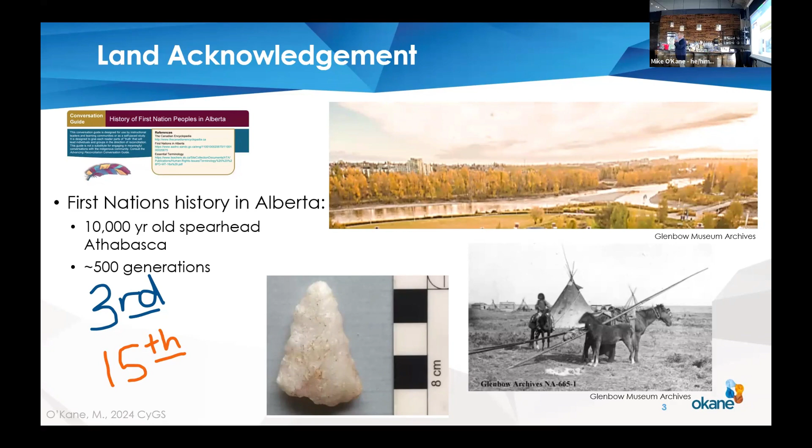And the point I wanted to make is that time becomes incredibly important. So one of the first things I wanted to land on with you, as we talked about a land acknowledgement and then switch to what I would argue is land transition, is that when you're transitioning land, you need to think about temporal scale. Time is important, getting on the same page about that.

So here's a framework that we stole, the International Network for Acid Prevention, INAP, when we wrote a global cover system design guidance document published in 2017. And we stole from the Canadian Dam Association a thought process and framework for thinking about temporal scale and time.

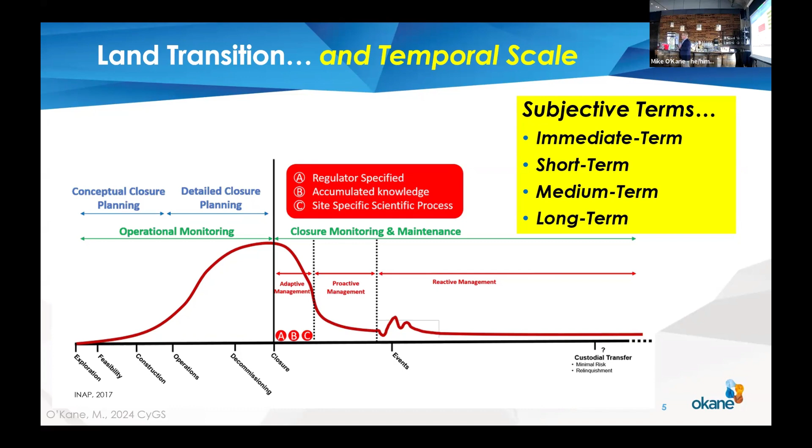So we know that's important, and we know it comes in throughout our industry. If you're involved with development of a resource and a project, you maybe have contributed to an NI 43-101. This is the instrument, the tool that allows us to define resources and reserves and use these modifying factors. It's the mining rule, the application of law and policy that allows us to develop our projects. And we measure over time the discounted cash flow of the value of the asset as we move from exploration to resource, to economic assessment, reserve, and then into production.

So there, time is important. Temporal scale is really incredibly important. Even if I was thinking about it—a lot of us are design engineers, we do a lot of design. Well, there's design life. What's your design life? Your life expectancy of the item you're designing. And what's your assessment period, of what you're actually going to go and understand risk?

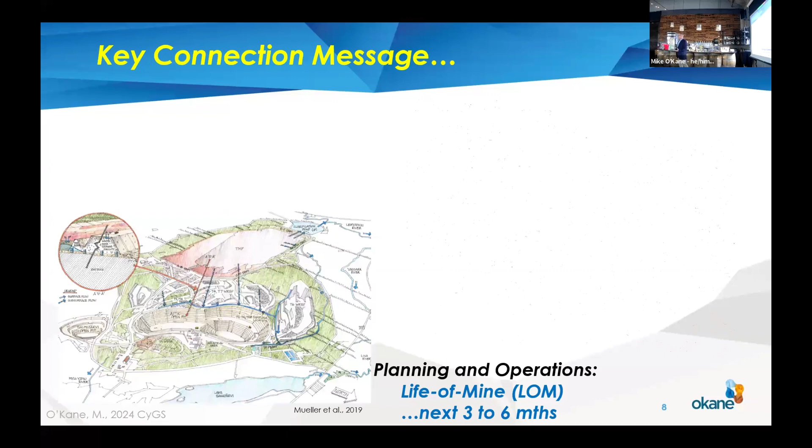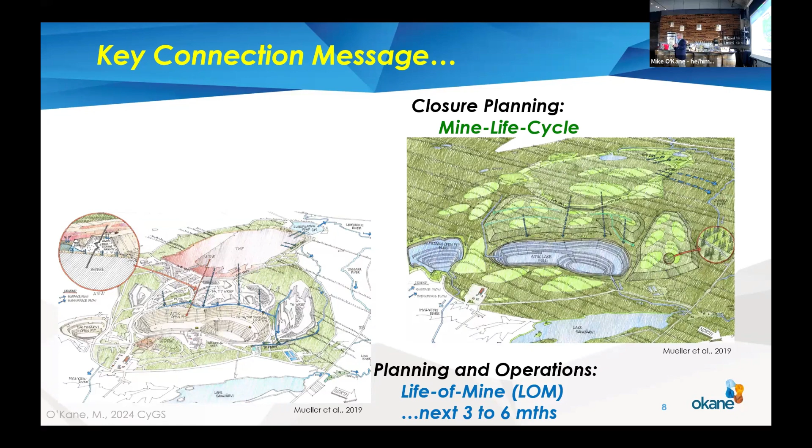Time is incredibly important. If I was in the mining industry and I was thinking of a mine site and I'm worrying about production and getting that rock out and being able to build my rock stockpiles and tailings storage facilities, it's planning and operations. Life of mine would have a different context for time if I was in the closure planning space. I'm a closure planning practitioner, I'm thinking of the mine life cycle. So automatically, if I've used these subjective terms and I haven't defined them for a particular project and with the people I'm working with, when I'm on a different temporal scale, I've got a different risk profile.

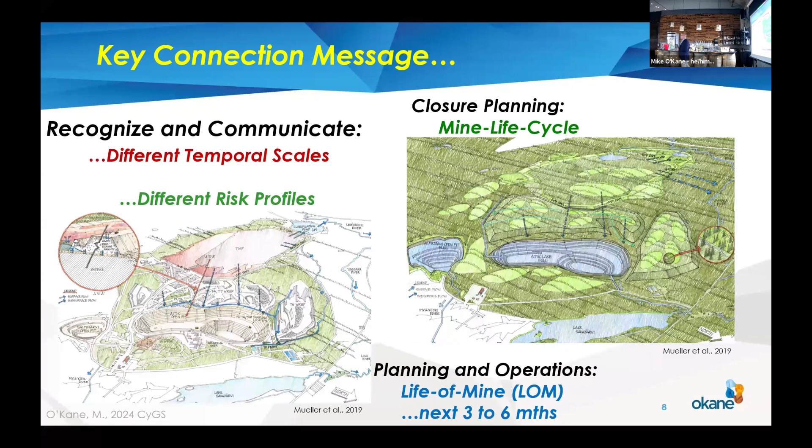And therefore, one of the key messages I want to bring across is usually when there's a disagreement about design, one of the first causes to look for is there's misalignment on temporal scale. What you think is important over time may be different than what I think is important, because I'm going to tell you, I'm going to solve that problem later, or vice versa. So temporal scale and getting in line with that is incredibly important.

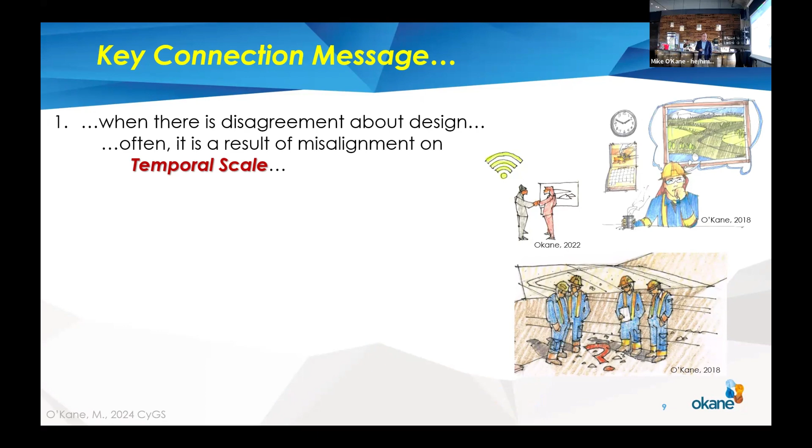Now, one of the things you may have heard of if you've been involved in the mining industry is these terms PAG, NAG, and TIL. Well, I was a haul truck driver as a summer student at a mine site in the north end of Vancouver, and all I knew is somebody would say, truck 1859, take it to the PAG pile, the NAG pile, the TIL pile. I had no idea. All I knew was I was making a lot of money as a haul truck driver.

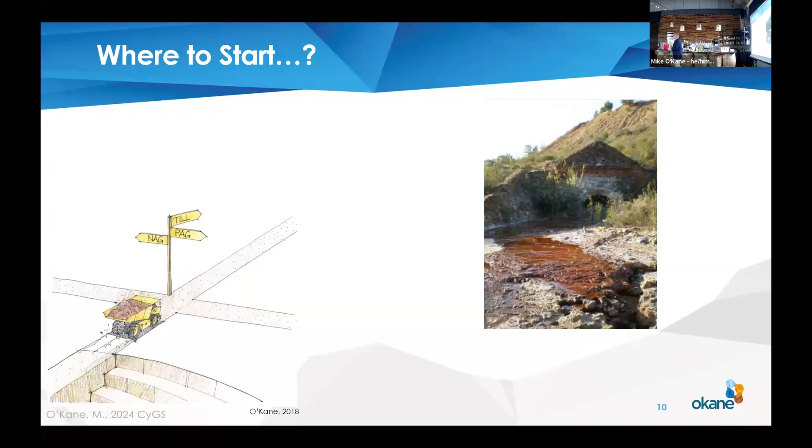Now, on the right-hand side is a Roman portal, and there's documented evidence from the mid-1500s of acid rock drainage. That's the familiar iron staining, that iron hydroxide that you see in the water. As the water at a lower pH becomes oxidized, the pH rises, and then the iron hydroxide starts to drop out. So that's that balance of the potentially acid-generating material.

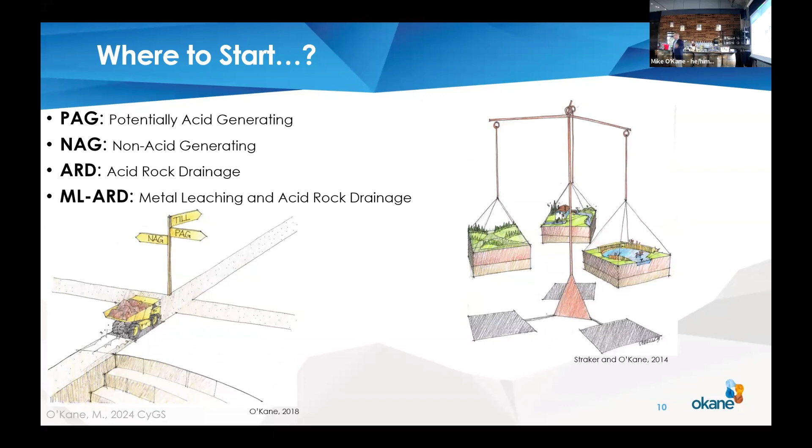Essentially, it's just accounting, right? We're balancing how much sulfidic material, the acidity we generate, against how much neutralizing capacity is available in the water. When there's 2 to 3 times more alkaline material, we label it as non-acid generating. When there's less than that, it's potentially acid generating. When it all comes together, it manifests itself as acid rock drainage, or metal leaching and acid rock drainage. That's what we saw in the picture there - metal leaching and acid rock drainage. That's the issue we most often have to deal with on a long temporal scale within the mining industry.

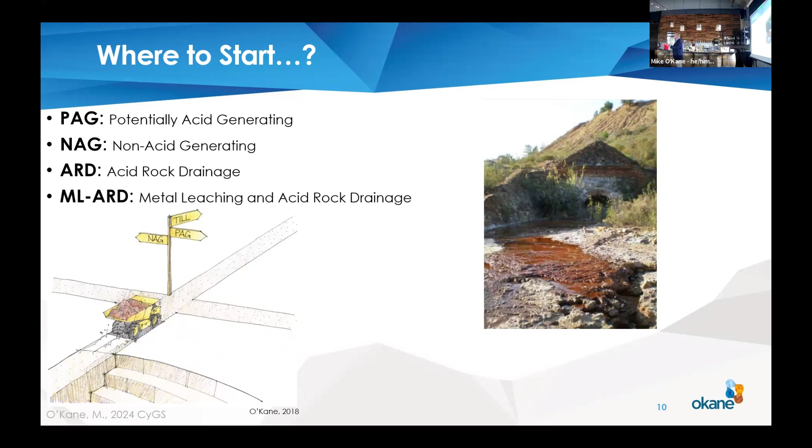Because what are we doing? We're taking something out of the ground and placing it in the first imbalance it's going to face - a thermodynamic imbalance. It's chemically imbalanced. We're providing oxygen to it, and it's going to want to move to a lower energy state. In addition, we're putting it above ground, so the other driving force, gravity, it's going to want to drive towards a lower energy state. So most of what I'm going to talk to you about today is these two things working against us: thermodynamic imbalance and gravitational imbalance, potential energy. Everything wants to move to a lower energy state.

And so that's what the application of what I think I do most often is - trying to balance this and understand it in the physical context of the mine waste and the mine rock that's actually put on the open pit.

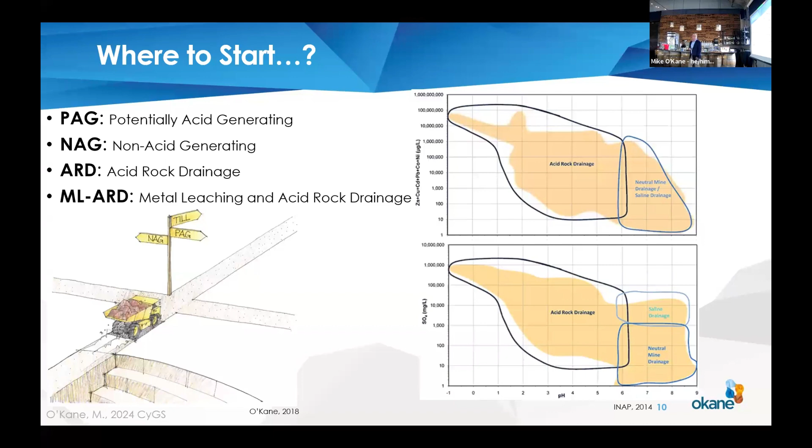So, PAG, NAG - I didn't know what it was. I was working at the open pit, the Island Copper Mine, driving my haul truck around. And I was very fortunate - I was working with my older brother, Kevin, and I was living out for free. I was even better off, I was a rich summer kid.

He was doing a project for the south wall pushback - about 1.5 kilometers or so of a 30 to 40, 50 meter deep slurry trench cutoff wall. That's Rupert Inlet on the right-hand side, and the open pit, so they had to hold the water back. Kevin was the project manager, I was a summer student, and I had to do a 4th-year project. So I said, this will be the easiest 4th-year project ever - I'm just going to take all that data, write my 4th-year project, and be done.

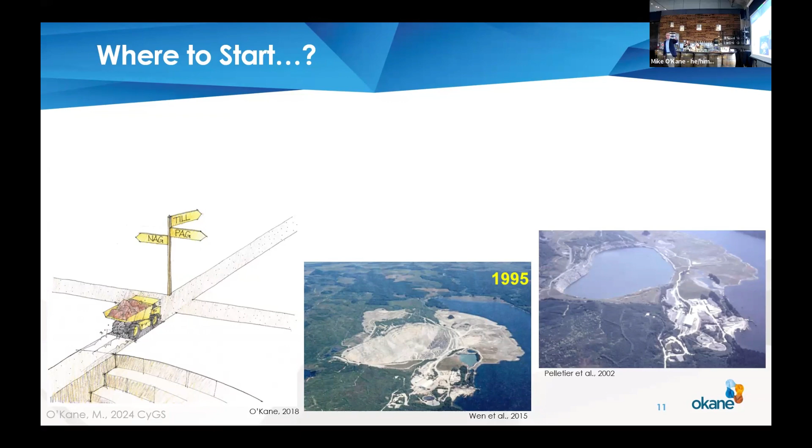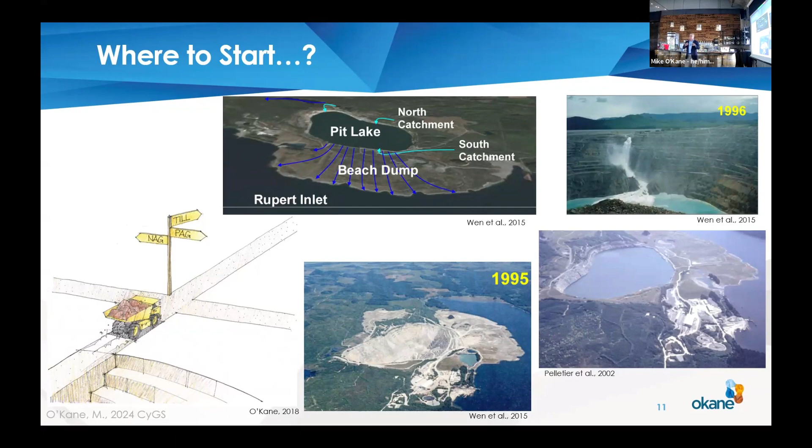But I went back and talked to Lee Barbour. I said, I've got the greatest project ever.

He said, that does sound really neat, Mike, but you should go back and ask your brother if there's an acid rock drainage issue with that mine site. I said, I don't know what that is. I went back and talked with him, and he said, oh yeah, we have an acid rock drainage problem. So that's how I first got introduced to cover systems.

How can we take that thermodynamic imbalance and that gravitational imbalance and put a cover system on to change the physics of the biogeochemical system in order to be able to have this system that stores water, releases it, and compacts the till layer and all that sort of stuff.

That eventually led me to do my thesis at the Equity Silver Mine, which at that time was owned by Placer Dome. I was very fortunate, I had a really hands-on thesis. I was installing sensors - in fact, we were inventing sensors in order to manage and understand how that cover system was performing. It had just been built, finishing construction when I was starting my thesis. We installed suction sensors, water content sensors, weather stations, lysimeters, and all kinds of things to ask: how's the cover system doing?

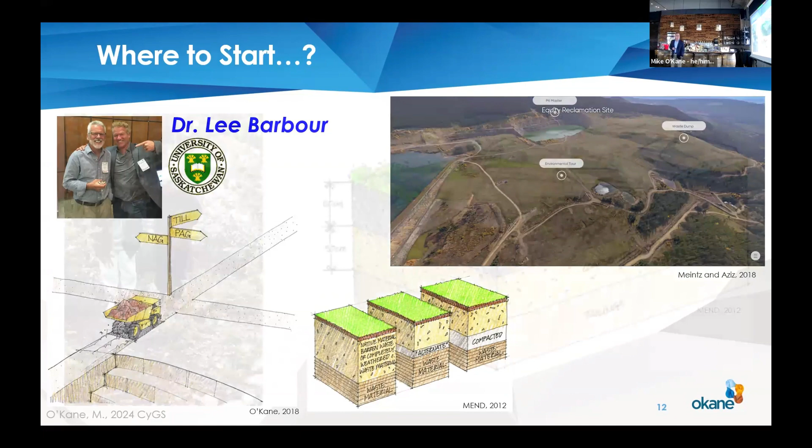And I tell her like this super cool cover system holds on to water and releases it back into the atmosphere through transpiration. She goes, that sounds really interesting, Mike. It actually sounds like gardening. I said, no, Auntie Kay.

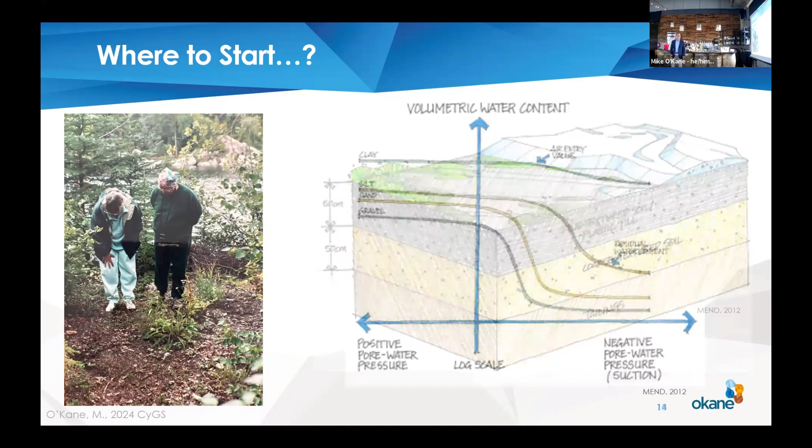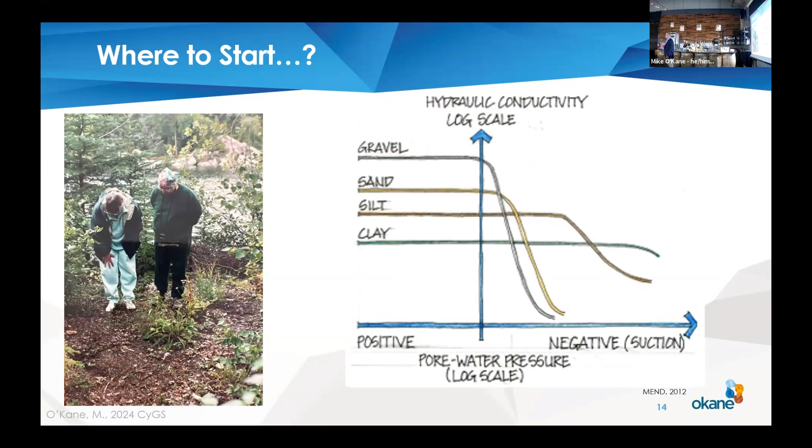She goes, so that really sounds a lot like gardening. And I said, no - I've got this data. If you see the data, Auntie Kay, I drew all these, and I said, look at all the water that's being held over this coarse textured material here. It's drained, it's a barrier, it's really neat stuff.

So that's the next key message: when there's disagreement about your design intent, very often, just simply turn it back to basics. Keep things as simple as possible, but no simpler, so you don't miss the little edges of complexity that you have to account for.

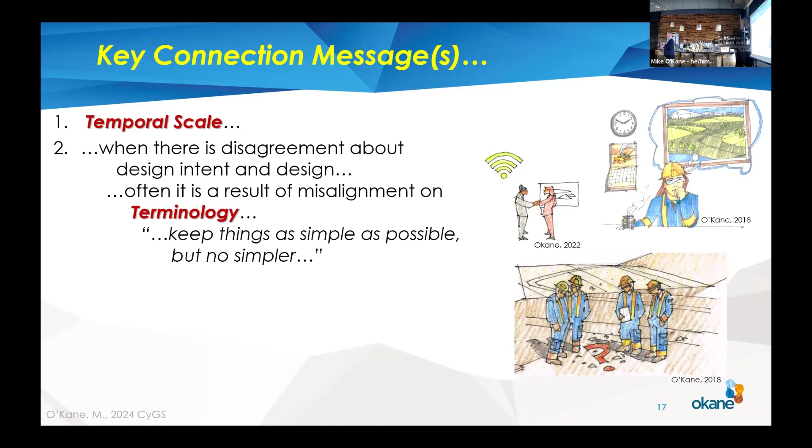So why unsaturated soil mechanics? This is what I grew up on, right? This is a chart from the Mine Environment Neutral Drainage Program, where we developed these different kinds of cover systems. This is the cold regions cover system design guidance document - a MEND report that we prepared for the federal government. There are all kinds of different cover systems: capillary break ones, reclamation ones, seasonally frozen capillary break ones, store and release ones, reclamation, isolation, saturated covers.

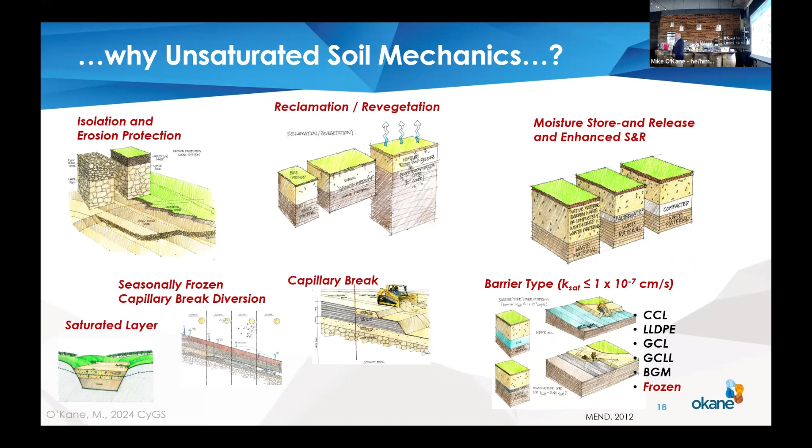So I don't need to go through all of these cover systems, but I did want to share with you a few things that I believe we all have in common. One of the first things is that they're all about land and water stewardship. They're that interface between the underlying material that the mine produces and the biosphere, right? They're what we need to be able to put in place, consistent with the landform, so that I can actually understand the land use.

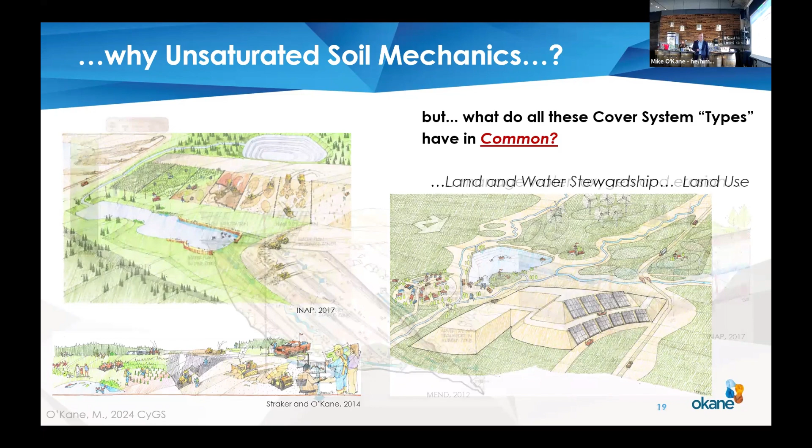So it's land and water stewardship, land use. I'm going to come back to that theme of the importance of land use later. And it doesn't need to just be ecological restoration - there could be all sorts of things: energy storage, energy generation, some combination of different things. What do they also have in common?

On the far left-hand side, it's about water - enhancing the near surface water holding capacity for plant water use. It's also about managing water: how much net percolation, how much goes down and leaches through, how much oxygen comes into the system, whether or not there's erosion. Have I created a system of high energy potential on a slope where the system wants to move to that low energy potential?

I want to manage water and oxygen to minimize net leaching and gas creation. So I've got systems that are uncovered with lots of high water flow, and I put a cover system in place to manage water and oxygen, then pick up any remnant seepage from the base of the facility that might still adversely impact the receiving environment. I do collection, conveyance, storage, and treatment of that seepage so water quality released to the environment is good.

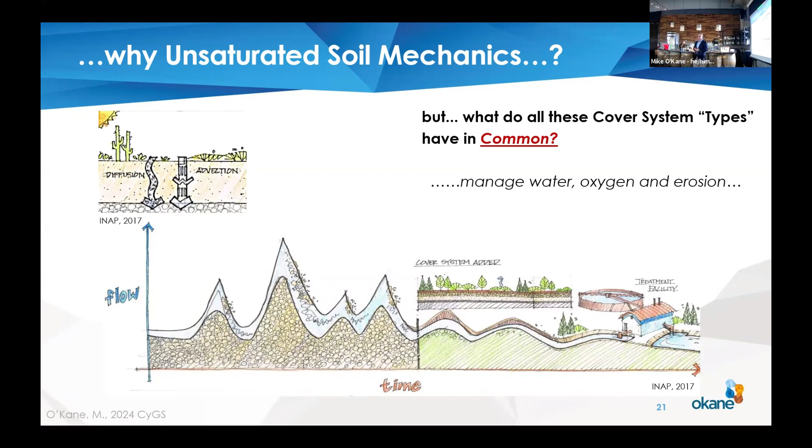As I said, they're unsaturated systems. Unsaturated - I didn't realize until third year soil mechanics, learning about compaction, that that's unsaturated soil. Some of the pores are filled with air, some with water, as opposed to a saturated system all filled with water. And finer texture material holds on to more water than coarser.

Their performance is dominated by site-specific climate conditions. If I was designing a cover system in Calgary, it would be completely different than if I was in the outback of Australia, because climate is different. If I was to design a liner, a pond, or a lagoon in those two different locations, arguably they might be about the same - compacted clay, permeability, and all that kind of stuff.

But because they're exposed to the atmosphere, their performance is dominated and influenced by site-specific conditions. So when I think of cover systems, it's climate first. The lens I look through is what's the possibility through climate first. We use the Koppen climate classification system to conceptually describe climate before doing any fancy modeling - what's the dominant season: arid, temperate, tropical, cold, and what's the seasonality of precipitation and rainfall. Before you know it, I've described the possibility of climate without even having to think about numerical modeling or averages.

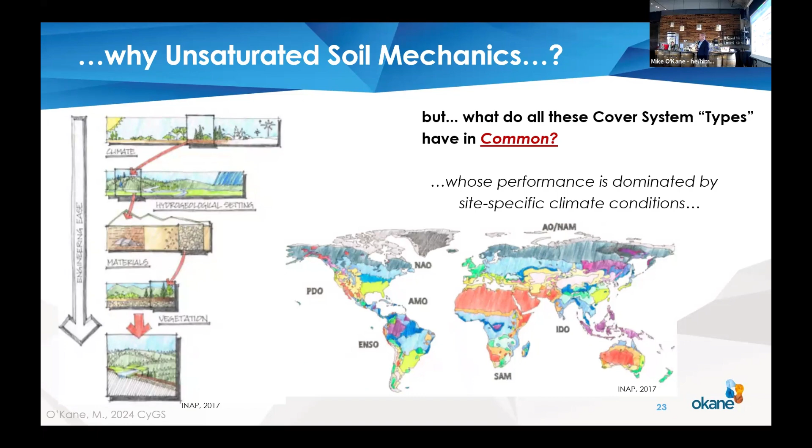So: unsaturated systems, cover systems, and landforms - think climate first, and always think that cover systems are not caps, or upside-down liners. You don't want to fight nature, you want to work with nature. Their performance is strongly influenced by site-specific conditions.

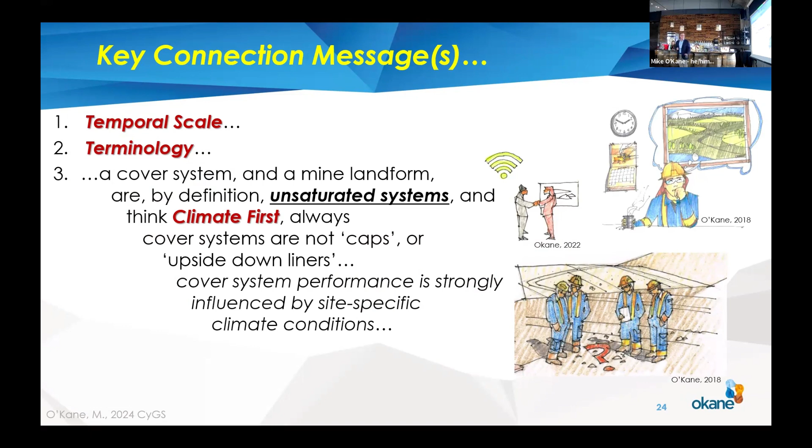What I was really fortunate about is my brother also worked in mining, and he's gone on to a very long career. He provides a lot of guidance and mentorship. But if I go back to the Island Copper Mine, I'll tell a story of another fellow who was a big part of my life professionally - Andy Robertson. I had a fortunate opportunity to interview him as part of the Landform Design podcast, Getting Closure. In that podcast, I told Andy the story of when my brother Kevin was hosting Andy at the Island Copper Mine.

Andy was the rock mechanics slope engineer, the consultant for Island Copper Mine. And Kevin was the chief engineer. He told his boss, Andy's coming to town, he's going to come and visit. And his boss said, well, don't let him near any more waste rock dumps because he's going to find more acid rock drainage. Stick to the rock mechanics. So Andy had a really good laugh about that. But Andy was a big part of my career, he was very supportive of me. I had a lot of long, great conversations with Andy over the years. So that's a super cool connection.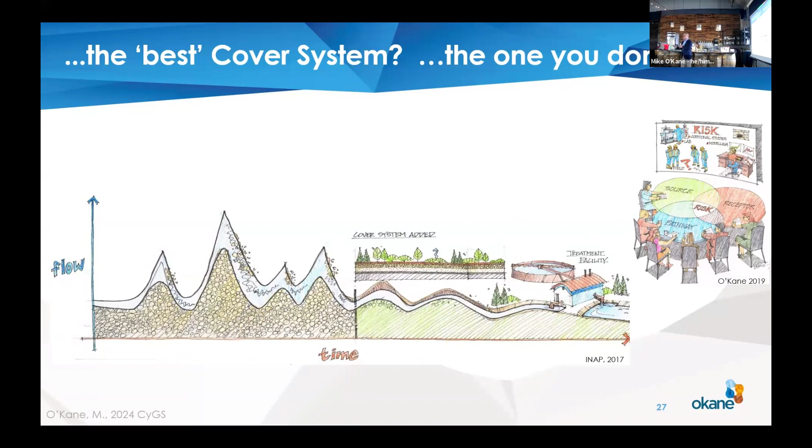And that would lead you to, on the right-hand side, where we'll focus. If you've ever done a failure modes and effects analysis, or a multiple accounts analysis, which is now standard procedure in the mining industry, in fact it's ingrained in some of the regulatory processes in many jurisdictions. Those were pioneered with the vision to bring them into our industry. So always talk about source pathway receptor, and you would recognize and say, hey, the cover systems and the treatment, that's a pathway and receptor management mitigation. Could we actually move up the chain and think about source control, and apply these imbalances of thermodynamics and gravity to be able to manage tomorrow's risks today, and not just rely on cover systems and treatment?

Because our lived experience is just this one example. This is from the Equity Silver Mine, and there's a great paper at the BC Metal Leaching and Acid Rock Drainage Conference by Corey Meints and Mike Aziz in 2018. They report over 30 years of water treatment, collection of metalliferous and acid rock drainage, and treating it in their high density sludge treatment system. Almost 1 million cubic meters of water treated over that 30 year period. Initially, the 100-year net present value prediction of what they needed for financial assurance, the Province of British Columbia, was $20 million.

In 2017, some 30 years later, it was now $88 million. So there's increases in understanding the source term, with water coming from different places than they thought there might be, increases in lime usage, increases in lime costs, all calculated along the way. And that's without the $1 to $2 million that were used to actually treat the water every single one of these 30 years. So our lived experience is, if we wait and try to solve the problem later, it might not actually be the best approach. Perhaps we should think about how we actually solve it from a source control perspective.

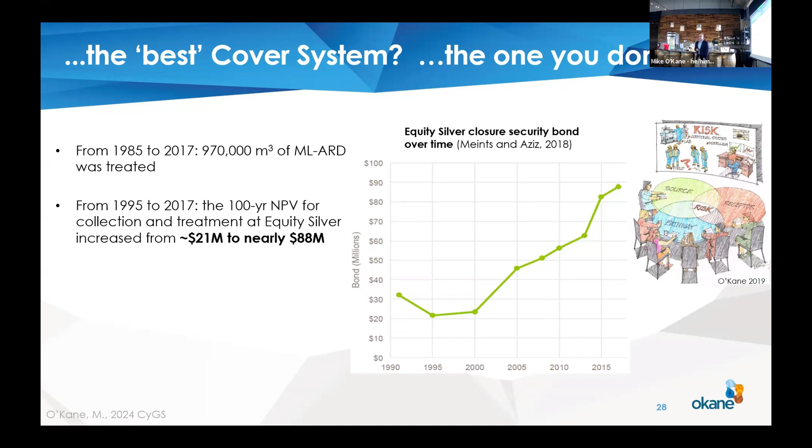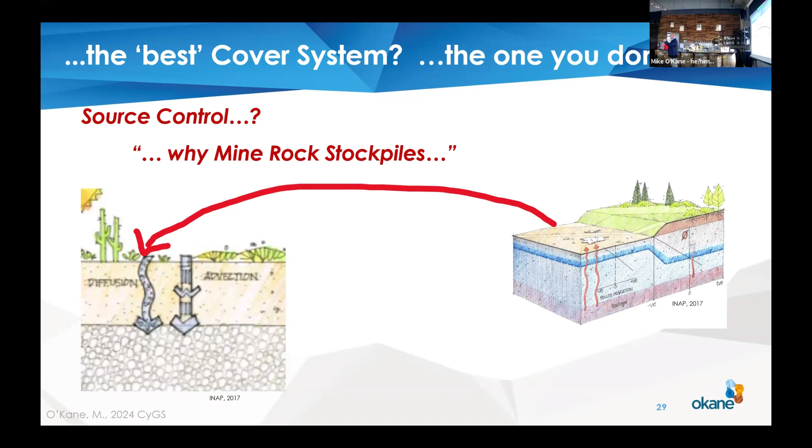So the next question is, why am I going to focus on mine rock stockpiles? A little bit about tailings storage, but why focus on mine rock stockpiles? It's because tailings storage facilities are finer textured material. The oxidation that results in that thermodynamic imbalance, that's a diffusion controlled system. It's surface dominated, right? It's going to diffuse through, oxidize sulfides, and have an advancing sulfide oxidation front. So it gets harder and harder to get oxygen into the tailings and oxidize that sulfide. It's self-limiting. On the other hand, mine rock stockpiles are dominated by advective gas flow entirely, as well as unsaturated soil mechanics.

I have a material that's coarser textured, generally well graded. I place it over a large lift, it segregates. I get rubble zones down at the bottom, coarse and finer textures all at angle of repose, generally coarser texture material at the bottom, finer at the top, but high airflow capacity. When I have a difference in temperature inside the facility compared to outside, I have thermodynamic disequilibrium. The warmer air is more buoyant, it will rise, it'll draw more gas in from the side, so I get this continuous resupply of oxygen for sulfide oxidation. If it's the other way around, where it's cooler inside than outside, if the temperature changes outside, that air will actually become less buoyant, it'll fall, and I'll draw more oxygen from the top. So I have this continuous resupply of oxygen, continuous sulfide oxidation, continuous generation of source. Of course there's diffusion as well, there's lots of exposed surface area.

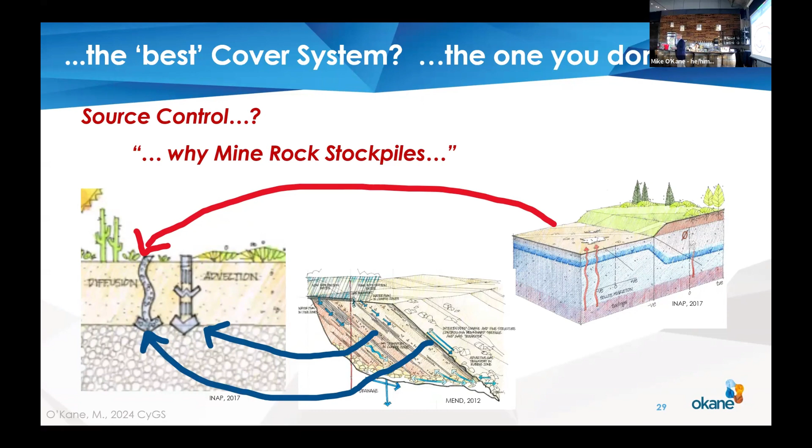So mine rock stockpiles contribute well over 75% of the acidity generated at the mine site. In fact, at Equity Silver Mine, in the 30 years of collection and water treatment data, almost 95% of the water they collected and treated is a result of the presence of mine rock stockpiles. It's not the tailings storage facility. In fact, where we often get metal leaching and acid rock drainage from tailings storage facilities, it's because the rock runoff contributes different elements, not actually from the tailings. Tailings need to drain down, we need to have all that oxidation product work through at a certain pore volume loss of 20, 30, 40, 50 meters from the top to the bottom, all the while picking up alkalinity.

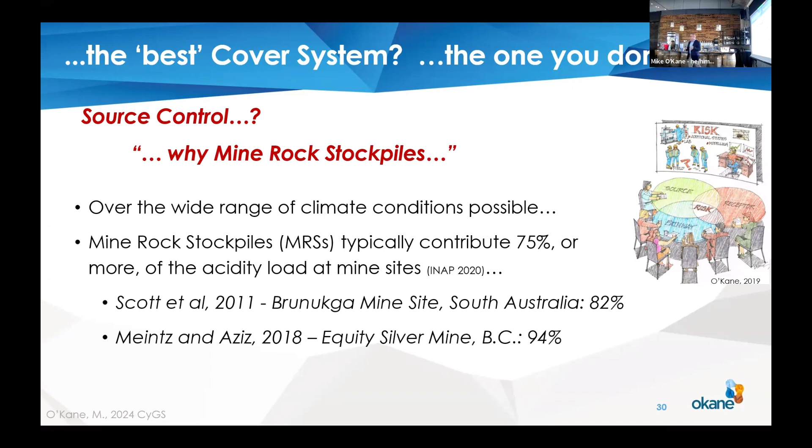A good friend of mine, Peter Scott, and I wrote a paper at the Brukunga mine back in 2011 at the mine closure conference. At that site, 82% of the acidity generated and treated is from the mine rock stockpiles. The mine rock stockpiles represent the biggest risk compared to all other landforms and sources with respect to metal leaching and acid rock drainage, because of that advective gas flow.

So how the mine rock stockpile was built influences how it performs. It's how it was built, no different than anything else - everything you build is defined by how you build it. Coarse texture material, segregation from depth, thermodynamic non-equilibrium always trying to come to equilibrium, and then the material wets up, and gravity, moving downwards.

So these are structures with high airflow capacity, consistent resupply of oxygen that continues, and ongoing acidity generation. Eventually it wets up, drains down, and I get metal leaching and acid drainage coming out of the base.

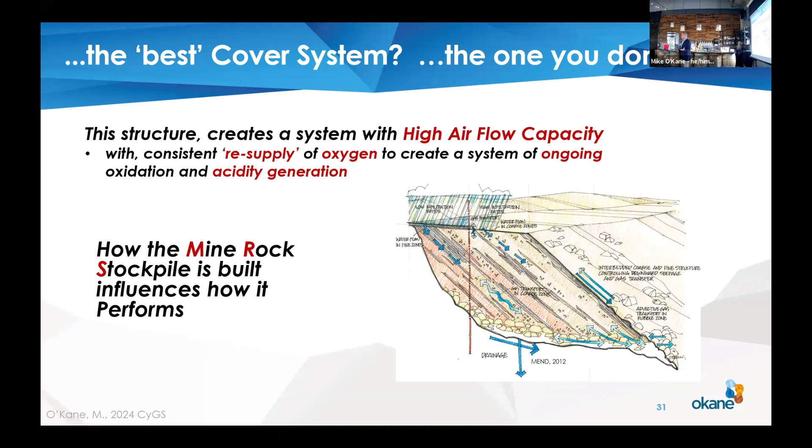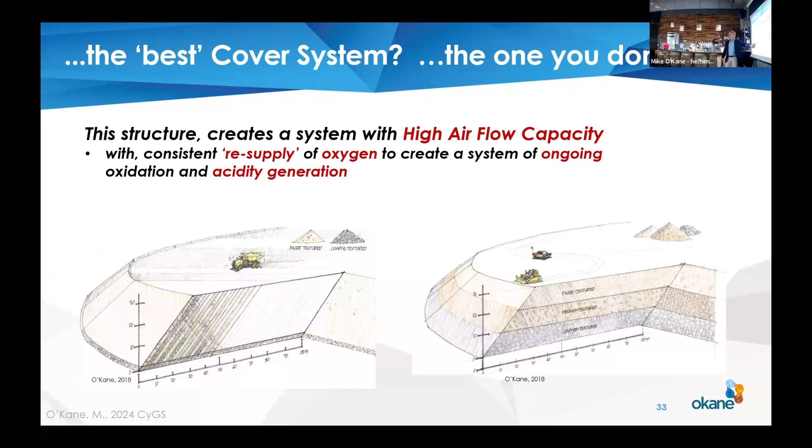Same thing happens for an open pit. The previous one I showed you was a valley type mine. So if I was on an open pit on flatter terrain, I get that same sort of action. I'll break out the two conceptualizations: here's my coarser and finer textured zones, here's my rubble zone down at the bottom, generally coarser to finer for that 30-meter length, as conceptualized. Those things happen as well.

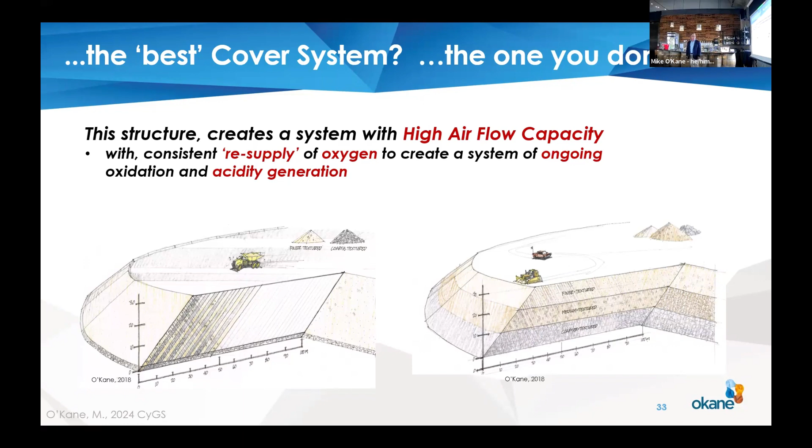So I end up with this system where I have non-engineered fill - that's the definition here, a geotechnical definition of sorts - a low level of control and a high level of uncertainty of my outcomes. And then I'm going to build this complex cover system on top of everything, and do water treatment. So I'm challenged with predicting the results with some confidence.

Surface water, the recoverable, unrecoverable seepage ratio - meaning I've got water coming this way and that way. What percentage of that water do I need to pick up in my collection and treatment system so that this unrecoverable seepage is okay to be released? That's a hard number to figure out. And then what's the quality of the water?

So the best cover system is the one you don't need, but let me build on that. I've got this water treatment - that's a proven technology, high level of certainty. There are new treatment technologies coming out, but basically managing low pH water, putting alkalinity in line with it and dropping it out - that's proven technology, right?

But I would put to you, collection, conveyance, and storage of water is not proven. It's incredibly site specific - how hard or easy it is to pick up that seepage is entirely site specific. I'm going to pipe that water. I've got a ditch - I don't want the ditch to leak. I'm going to pipe my seepage, put it in a pipe.

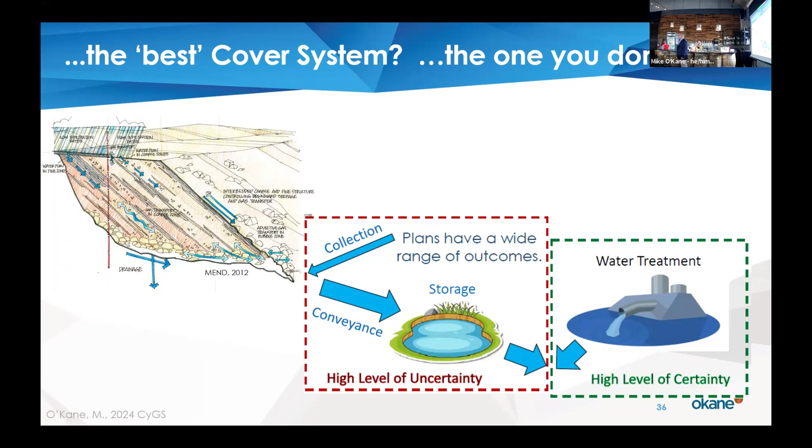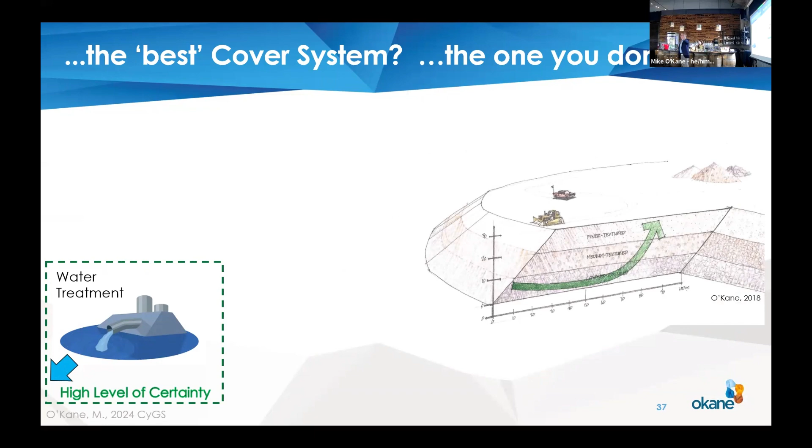So the same thing happens when I take this water treatment to my pits - my open pit on flat terrain. Here I'm depicting deep ingress of oxygen, continuous resupply. It's warmer inside that facility than outside, so I'm gathering up gas, continuous resupply of oxygen. Same problem - I've got to collect, convey, and store water. Lots of uncertainty there. And this is the tool that we look at, right?

Decision making, there's a science behind it. I've got a high level of uncertainty and a low level of control - automatically get out of the fantasy world you're in, in this scenario. A lot of different situations you have to take into account, a lot of uncertainty, a lot of outcomes.

Now, the other part is I can reduce the uncertainty and have more prediction and monitoring. So what path do you actually want to go? Okay, let's go down this first path here.

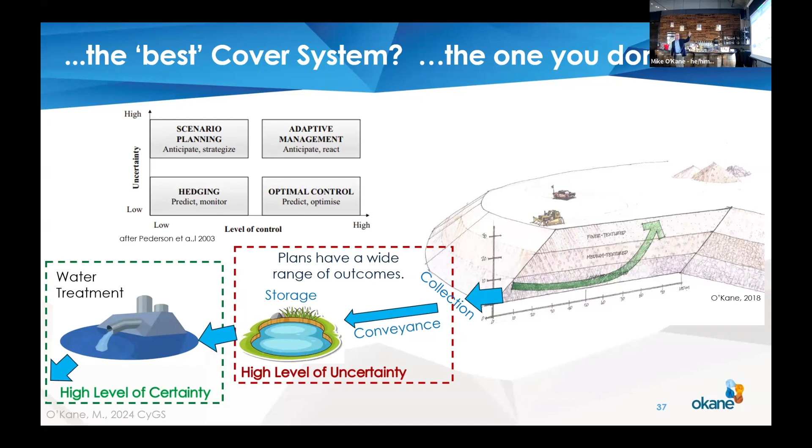Let's actually build my mine rock stockpile, recognizing that I've got run of mine material, but I just have to apply a little bit of civil engineering to it. I'm going to reduce the lift height to reduce the segregation. I'm going to add a finer textured layer on top of each one of those layers.

And what do finer textured layers do for us? They hang on to more water. When I've got more water in something, the air permeability is low. When the air permeability is lower, I reduce the vertical airflow capacity. So now my airflow capacity, with the same thermodynamic equilibrium, can't reach far into my mine storage. I've created a large zone of suboxygen, no resupply of oxygen. And as water flows through, it actually has an opportunity to pick up more alkalinity.

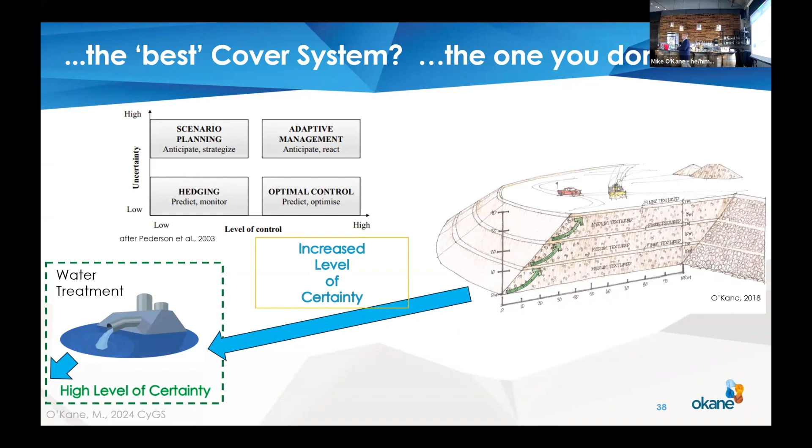Now I have an increased level of certainty, seepage collection ratios, simpler cover systems. So the cover system that I don't need is the one that's super complex. It's going to save the day. I can have a cover system that's just actually about erosion, landform stability, and water, not one that needs to be this magic thing. And I can manage the risk more effectively until the cover system is placed.

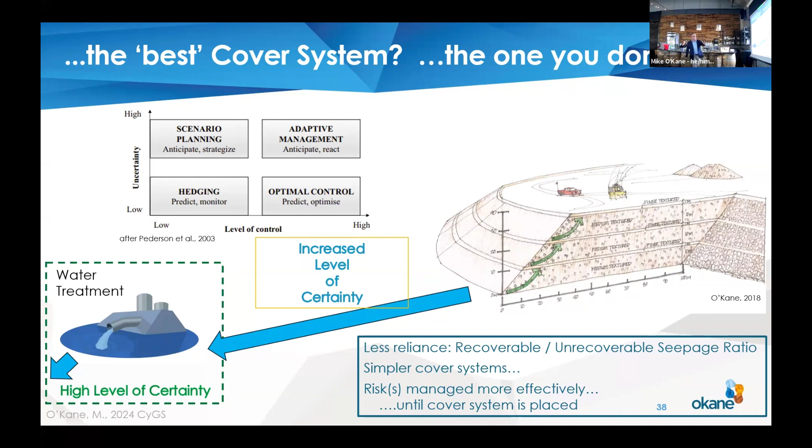Managing at the source, here's an example of that. On the left, this is from a site in Turkey. On the left is a mine rock stockpile that's constructed and end-dumped. On the right-hand side is one that has source control. So you can actually figure out what's the difference in cost to place them differently.

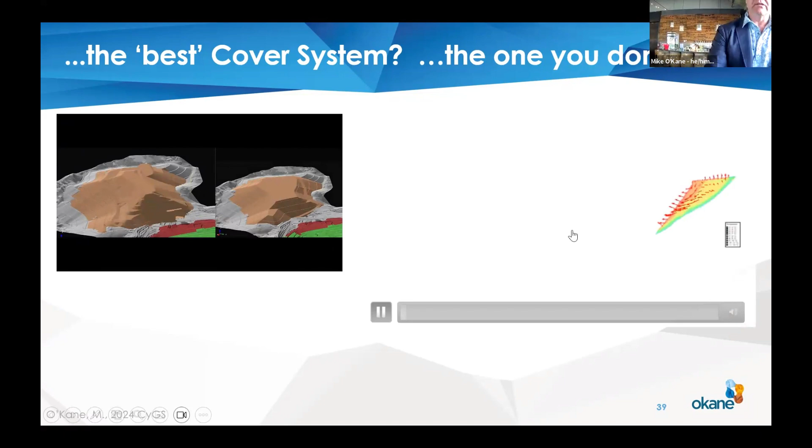And then you can say, Mike, that was a lot of arm waving with all that conceptualization. Well, I'm telling you, we can model it too. Here's that conventional mine rock stockpile. This is a coupled heat, water, gas model that allows us to predict the movement of gas and resupply of oxygen to that facility so I can calculate the acidity that's generated.

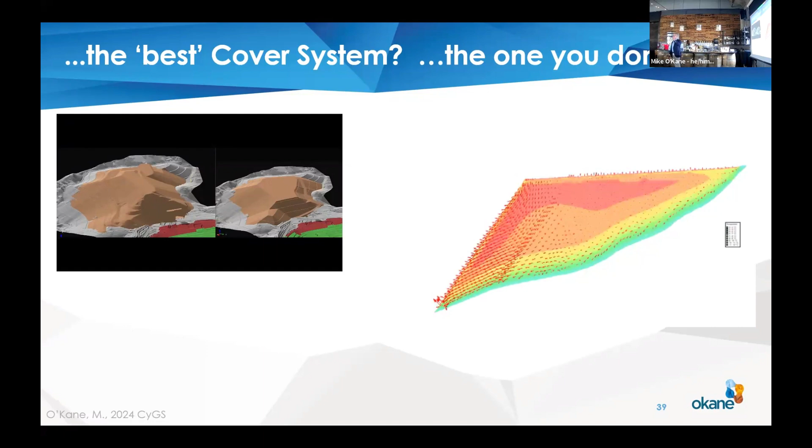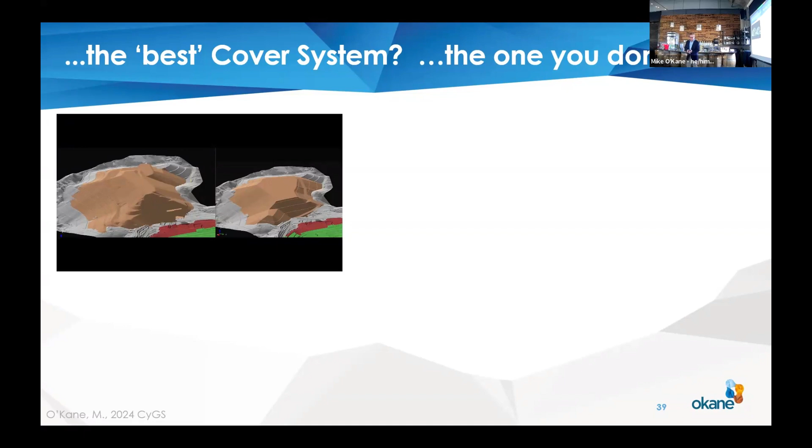Those red lines that are going back and forth are arrows, right? It's a 10-year simulation of mine rock placement and 15 extra years of sitting there operating. And what that ends up doing for us is it tells us that every time the temperature is warmer inside than outside, I get more gas in, and flip it around. So then I can take one of the days within that 10 to 25-year period after it was built, and I can plot up the differences in velocity vectors, the resupply of oxygen for one day, and compare them.

The other cool thing that happens is because sulfide oxidation is an exothermic reaction that generates heat, well, now I have much less heat generation in the facility. So now I have much less worry about the temperatures inside the facility increasing more and more. Actually, at the Sullivan mine, the temperatures that I was monitoring when I was a graduate student were like 55, 60 degrees Celsius.

There's rock that monitored at the Mount Whaleback mine, the BHP&R in Western Australia. It's a spontaneous combustion self-heating material. They can have temperatures 200, 300, 400 degrees Celsius. So once this thing starts to kick off, and anybody who's worked in the Elk Valley is familiar, you know that there's a bit of a self-heating problem. Right? All kinds of bacteria. It's about gas, thermodynamic ability, and understanding the unsaturated zone system.

So an MRS that's built with influence how it performs, a mine rock stockpile with a focus on source control represents the highest level of risk control, which is manage tomorrow's risk today by building a mine rock stockpile with source control rather than conventional. I understand that our mine plans have the constraint of the least cost manner of getting the rock out of the pit, onto the ground, putting the rock on the dock.

And we also have to make sure they're geotechnically stable, and environmental protection. Changing the 'or' to an 'and', just like we do cheapest possible and geotechnical stability, I'm adding an 'and' to manage more risk today. Adding another constraint to the mine plan - would you think about it? Amazing things can happen when you change the question, you get a different answer. Just consider it and see if you can actually.

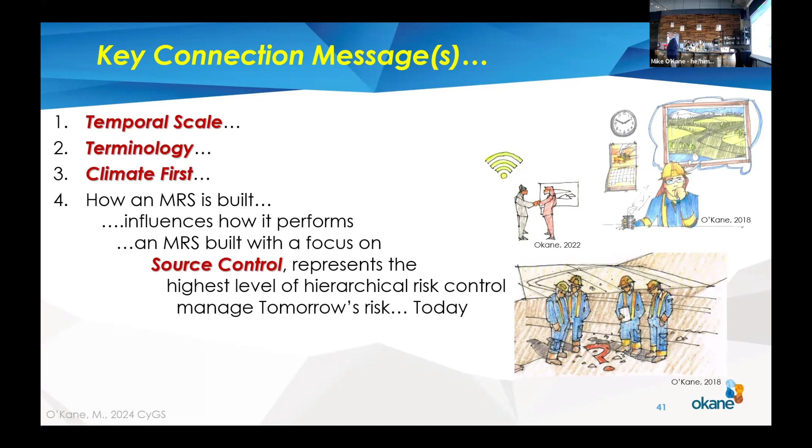So tailings a little bit. For me, it comes down to where's the water table? Where's the phreatic surface? Where is it now during operations? Where is it going to be in closure? And if you put the right controls in place with confidence, then you're going to take that full water pressure system from today to tomorrow in the right means. It always comes back to the same thing: how is it built? What's the water balance? What's the water pressure condition? Where's the water table?

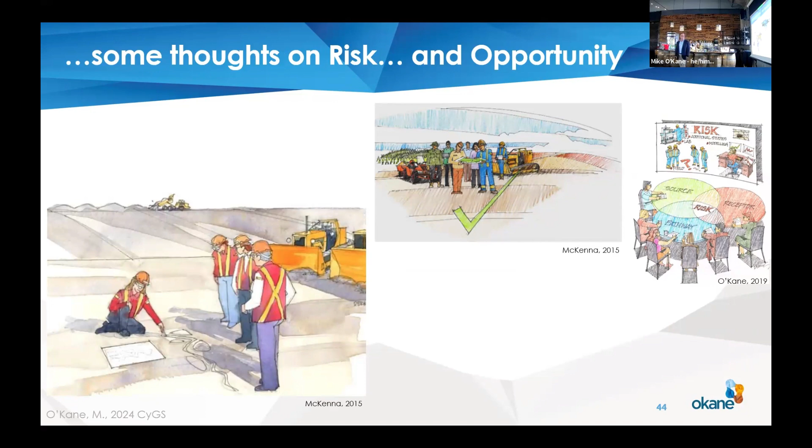So some thoughts on risk and opportunity, keeping in mind this context of what I learned from Andy Robertson. How many people were living in Calgary in 2013? Do we all remember the floods? So this is the story behind my flood here along the Elbow River. It was in and around there, and it was amazing, right? So much water.

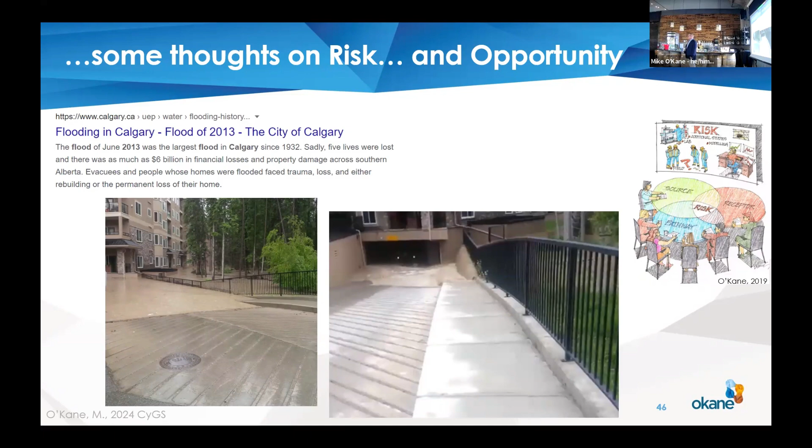These are the condominium units, the bedrooms, right there - there's one on the left and one on the right, the two photos. Can anyone tell me, just make a wild guess - what do you think is the time frame between the one on the left and the one on the right? Guesses? Would anyone guess 8 years? These condos flooded while they were being built.

So in 2005, the exact same thing happened, but the maximum foreseeable loss at that time was almost next to nothing. We just got graded, there's no infrastructure down there - no HVAC, no generators, no elevators, nothing like that. So it flooded, big deal, we let it drain, moved back in. But it happened again in 2013 - everyone was in the building, a bunch of cars got damaged, the entire HVAC system got hit, all the elevators, everything. $30 to $40 million in damage paid by insurance.

Can you imagine if we learned from this and built up a pony wall instead of a gate, or whatever fence here - actually built it up, put a berm in the background? That would have been a huge savings. So very often when we're thinking about risk and opportunity, our answers are right there.

And this is the thing that Lee Barbour was really good at, and Andy Robertson was really good at - you couldn't go into a review meeting with them because they read everything that you did. That's why they were so good, they mined the data. And that's the lesson there: they would always think about what's the most reasonable expectation, not what's more likely, always thinking about maximum foreseeable loss, and then come back from it. Rather than trying to say 'I've got so much uncertainty, what do I do to reduce the uncertainty,' they would ask, what's the maximum foreseeable loss? Impose controls, figure out what the risk is, and see if you can actually afford to live with it.

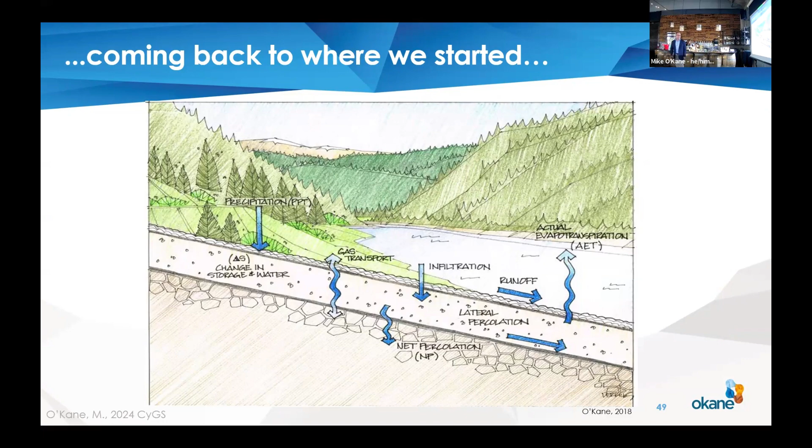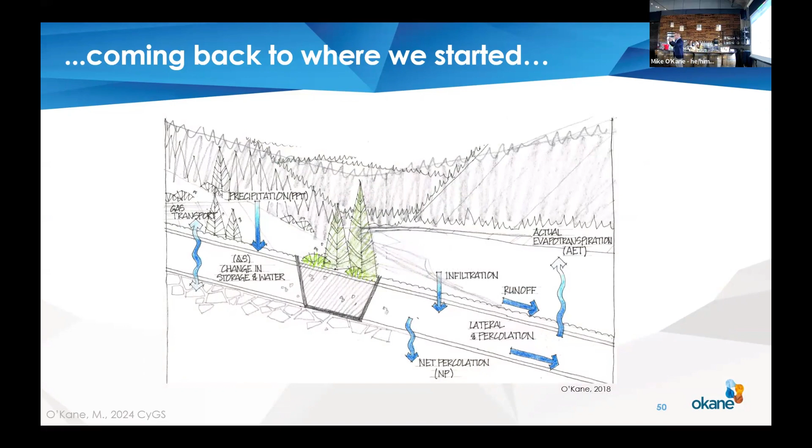But try and start to make things simpler for yourself. Just think about narrowing it down. And in fact, if you really thought about it, you could figure out the water balance for this: how much rainfall and snow water coming in, when the storage is overwhelmed, how much goes through, how much runs over the top, how much of that evapotranspires.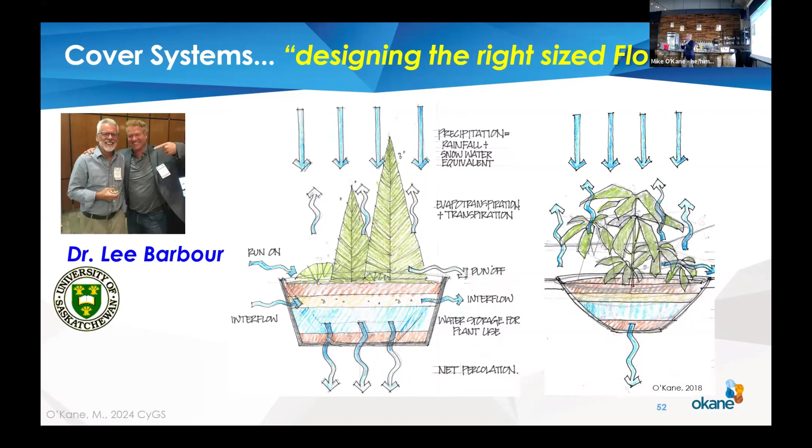In fact, cover systems are like designing the right sized flower pot. That's the lesson from me. You would always bring that forward, design the right size. Keep it as simple as possible, and no simpler, to have your complexity captured.

So cover systems are about designing the right size. Start off with a really strong conceptualization, and don't jump to the bottom. You'll get the right model that tells you the story toward conceptualization. Every single one of your conceptualizations should just tell a story about whether or not we have the right size.

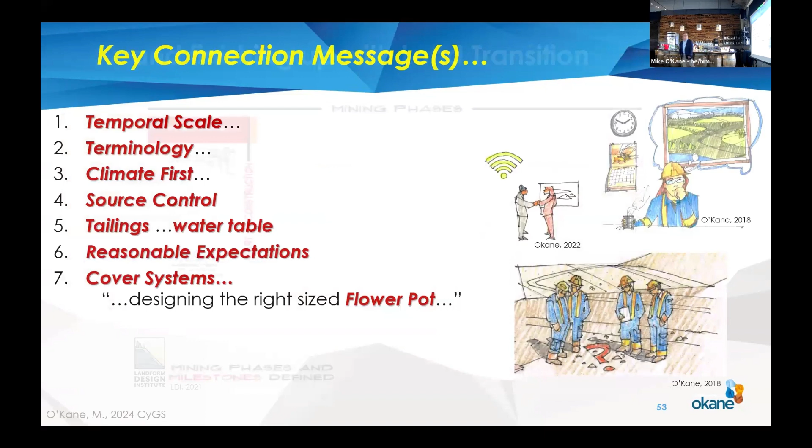So, finishing up with land transition. We struggle within the mining industry to think about what's the future when the mines close, right? My perspective is the mining industry is actually really good at understanding the value of future values. Because if they weren't, why would you go and spend money drilling and getting a permit to do exploration?

We do it because we have an eye on getting to a project description, and in the 43-101 to get more investment, to invest more money, to get another permit to do an environmental assessment. And then I want to spend more money, more investment in baseline studies to get it to a permitting condition. Then I want to spend more money because I want to get to the next land use, which is construction. I'm going to spend more money because I want to get to operations.

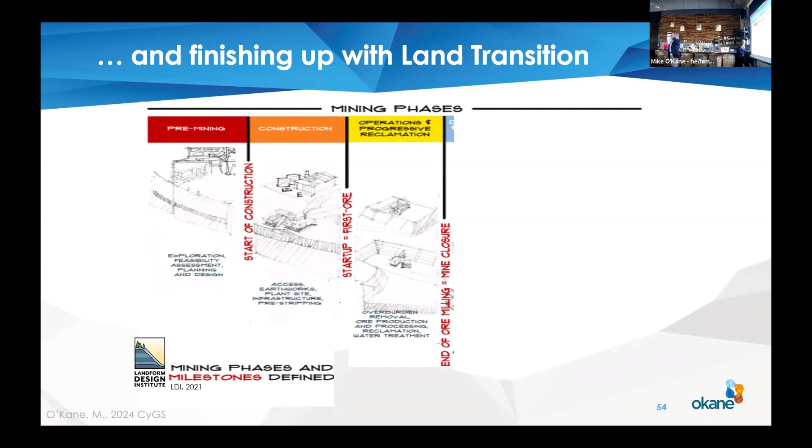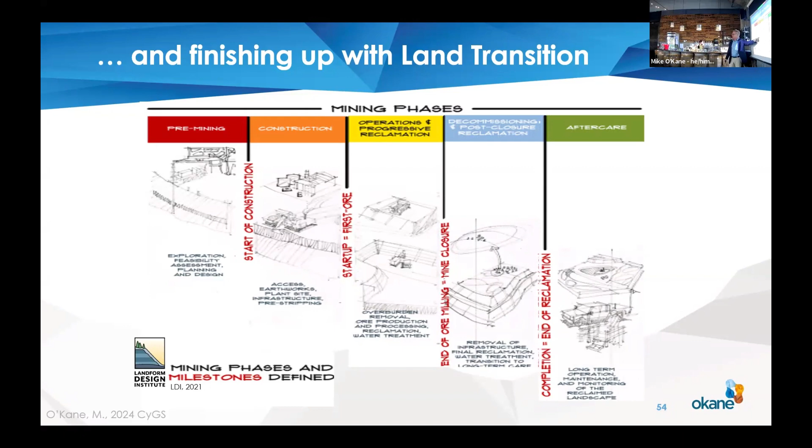The thread that we're missing as we go to closure is we lose sight of the importance of that future land use. I don't want to make a commitment because of what I want. When you weren't worried about that back here, what you did is you did the hard work to go find out, so you'd have more confidence. Right? And the same thing, future land use is that thread across time.

Future land use can be anything. I'm just pulling this from the BC jurisdiction. If you go into 10.7.4 land use, it doesn't say land use has to plant grass or trees. It says land use has to be approved by the chief permitting officer. Every single jurisdiction I've ever come across in the world is exactly similar. It can be anything we want. We just have to actually do it.

In Saskatchewan, when we go to relinquishment, that's one of the first models about relinquishment, the institutional control program. It's about saying, I'm going to monitor over time, so I have confidence, I understand the maintenance on an annual basis, and the unforeseen funds that could come up. So this site, the Cluff Lake site, was moving into Saskatchewan's ICP, which is the institutional control program for relinquishment. It's on its last permit from the federal government licensing. Orano has done an amazing job over 20 to 25 years of moving it towards this.

This one's near and dear to me because this is one of the first cover system landform designs - the mine rock stockpile on the bottom and the tailings storage facility at the top. Right, over 20 years, keep the faith, think about the future land use, and we're going to move towards it. So it can be done when you're thinking of the future land use and where you're going to go.

And the tools we have are there. Look at the modifying factors to take resources to reserve: legal, environmental, infrastructure, social, economic, and governmental. Those are all about the future, right? So you have somebody who's investing in your property has confidence that you've done it right.

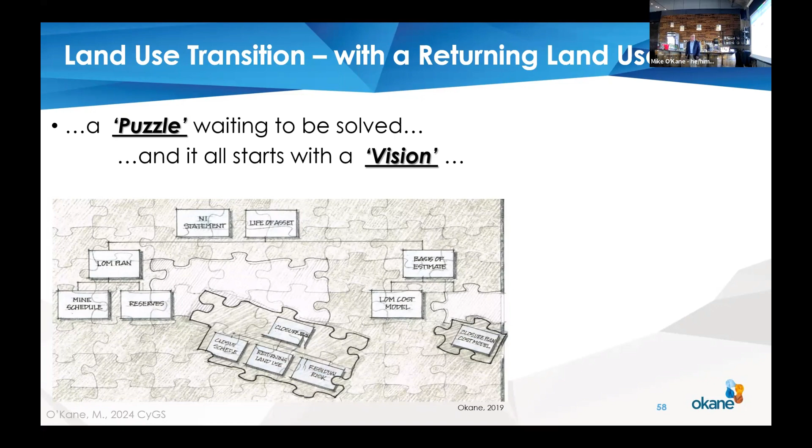So in my mind, the puzzle that's waiting to be solved starts with a vision, right? I've got my life of asset and my NI statement, my LOM, my mine schedule, the reserves, my closure plan, my cost models for closure, my basis of estimate, LOM, and that missing puzzle piece, when I think about it, is returning land use - that's the piece. In order for me to have confidence with the closure plan, I've got to land on returning land use. And where does that returning land use come from? It comes from this vision.

I'm thinking that our assets are not liabilities, they're opportunities. How is it possible that an open pit is an asset for the entire life of mine, even before it's built, and magically it becomes a liability when it's closed? That makes no sense to me. It has to be otherwise. We just need to change our thinking.

A vision for closure is a high-level aspirational description of what an owner, an operator, rights holders, stakeholders and local communities want to achieve. This is taken right out of the International Council on Mining and Metals, ICMM. What I've done is I've just added rights holders here, because ICMM considers stakeholders to include the community and the indigenous people and rights holders. I've actually taken that out. It's otherwise the same thing.

And a vision allows you to actually demonstrate how you're going to achieve that through the implementation of the program. And a vision is where to start.

Has anybody been to the Butchart Gardens? That's a great example. I'll quote directly from their website: it all began with one woman's vision and passion with a former limestone quarry for her backyard. Jennie Butchart envisioned landscaping a sunken garden in its place, transforming the property for her family and visitors for generations. It wouldn't have happened without the vision. I get it, you gotta have a path, but it starts with a vision.

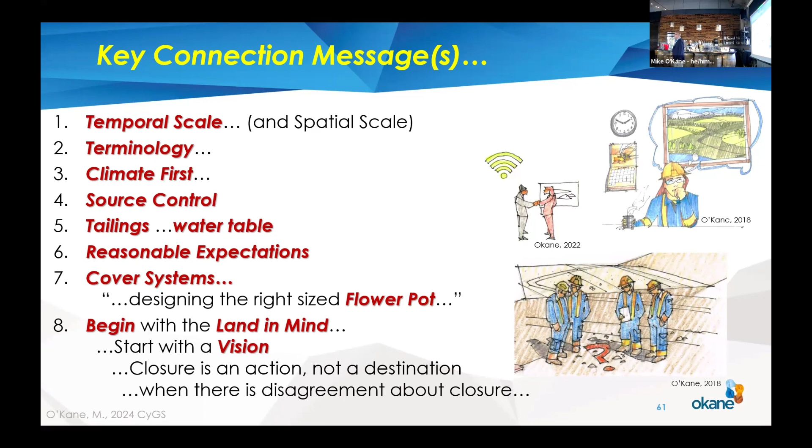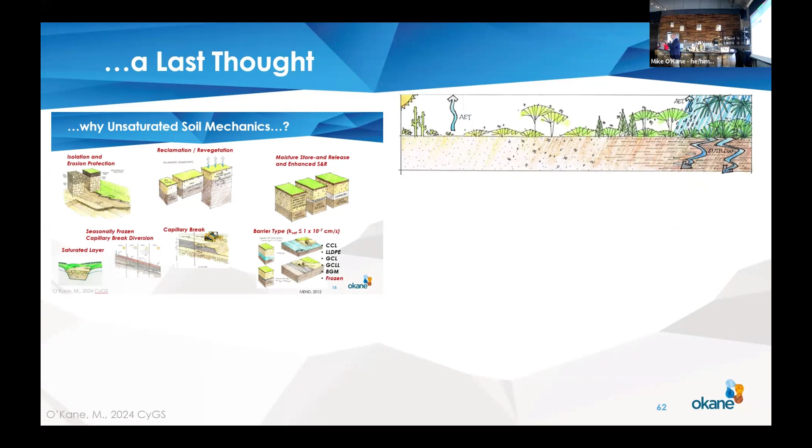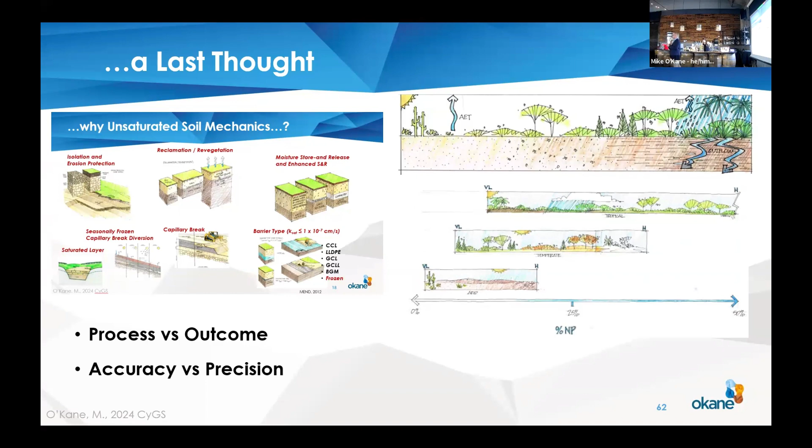All right, last thought. I gave you a lot of process time - process guy, I'm not into the details. I'm just going to give you a little bit of detail of things. So process versus outcome, offer some outcome. Accuracy versus precision. If I was to use this INAP guidance document, I would tell you, hey, you guys should figure out what the very low, moderate, medium, high, and very high net percolation rates are.

It's really important when we conceptualize something to be very accurate about whether I'm here or here or here. High level of confidence - don't need to be precise in that. I want to be accurate about what range I'm in, but being precise is related. So that's an outcome from the strong conceptualization of thermodynamics, knowing a lot about equilibrium and gravity, and how they relate to climate. What box am I in on a wide range?

And if I start with that, being accurate and confident about it, the design details of the precision that I need within that box come later. That's 30% design, that's 60, that's 90. But if I don't start with strong conceptualization, I'm going to do a bunch of work that's completely out of line with the better action. If you're not thinking that way, you will forever be in some error.

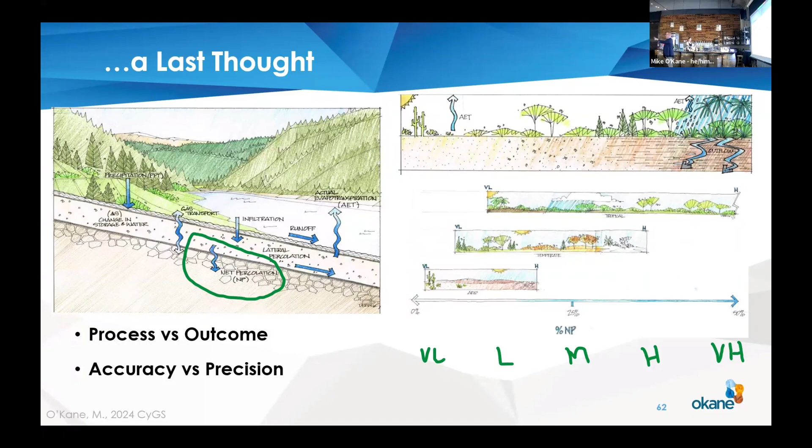Accuracy versus precision - the classic one is the bullseye. I don't want to be precise when I'm shooting at a bullseye and everything lands up over here. My wife's laughing because that's what we shoot. I want to be accurate right around the bullseye, and precise.